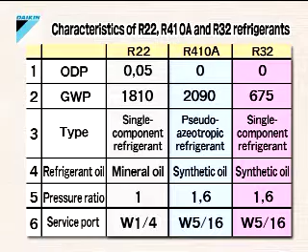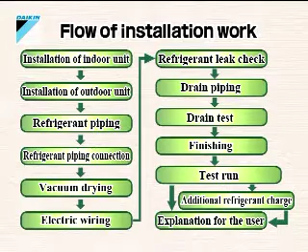This shows the procedures involved when installing split-type air conditioners. This video explains the installation work by the specific procedure in the actual order it is done. First, let's look at the primary tools you will need when doing the installation.

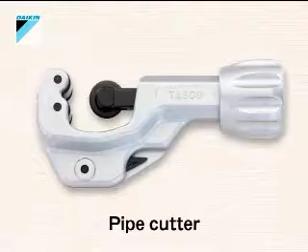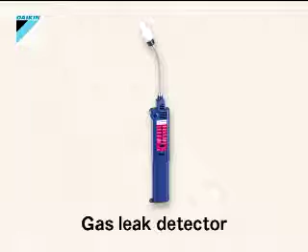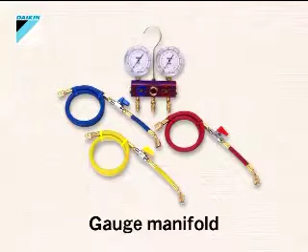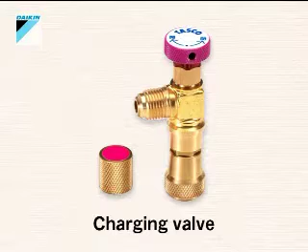Here you can see a level, pipe cutter, reamer, file, flaring tool, flare size gauge, vacuum pump, gas leak detector, weight scale, digital thermometer, torque wrench, gauge manifold. These are gas cylinders for R32 refrigerant. There are no fixed colours for refrigerant gas cylinders. This is a charging valve. These tools can be commonly used for R32 and R410A refrigerants.

Now, let's go over the procedure for installing the indoor unit. Let's look at how to attach the indoor unit's mounting plate. The mounting plate is smaller than the indoor unit, so decide its location taking the size of the indoor unit into account. Also decide ahead of time on which side of the indoor unit the piping through hole will be made.

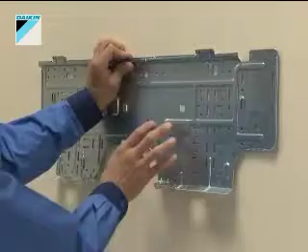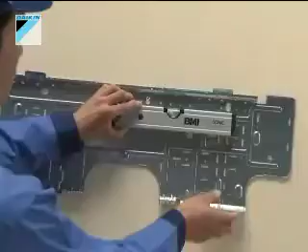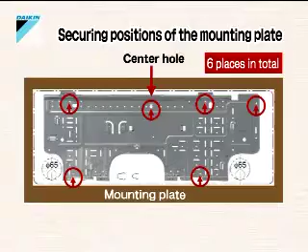Once you have decided where the mounting plate will be attached, temporarily place a screw in the center to secure the plate. Place the level on the mounting plate to make sure it is level. Once this is done, firmly tighten the screw on the center of the mounting plate so that the plate does not move. After that, secure the plate with the 5 remaining screws as shown on the screen. Now, you should have attached the plate firmly with a total of 6 screws. Finally, check that the mounting plate is firmly attached.

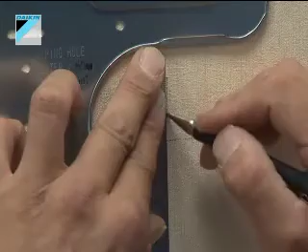Now, let's look at how to open up the piping through hole. If running the piping through the right side, use this part on the mounting plate and the tape measure to determine the center of the through hole. If running the piping through the left side, do it this way.

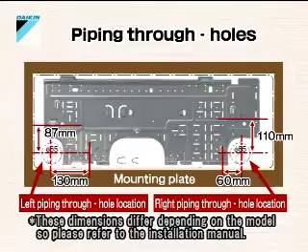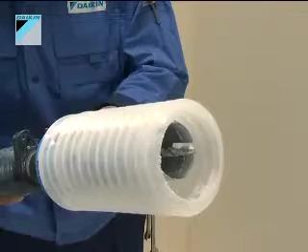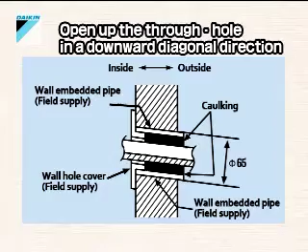The diameter of the through hole is 65 mm. So, use a 65 mm hole saw to open up the through hole. When opening up the through hole, do it in a downward diagonal direction, from indoors to outdoors, to help the drain water flow smoothly and prevent rainwater from running along the piping into the indoor area.

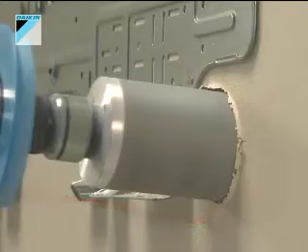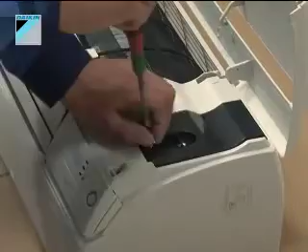Let's look at how to prepare to install the indoor unit. Take the indoor unit out of the packing case and place it on a level surface. Open the front panel and remove the cover of the control wiring connection component. Remove the clamps that are used to secure the wiring sheath.

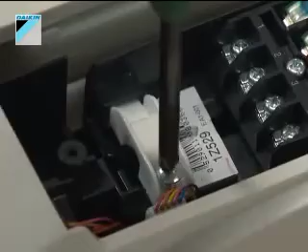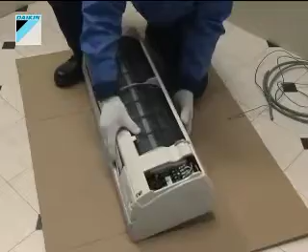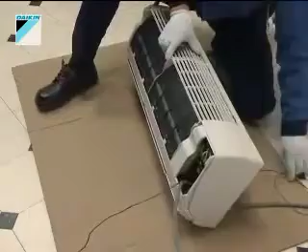Now, prepare the control wiring that connects the indoor unit and outdoor unit. If the wiring length is shorter than 10 meters, use a 2 square millimeter wire. If it is 10 meters or longer, use a 3.5 square millimeter wire. Run the prepared control wiring from the rear of the indoor unit to the front side. Peel the wiring sheath.

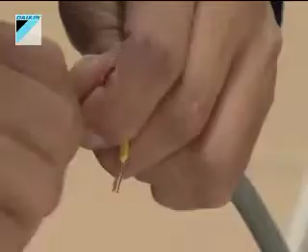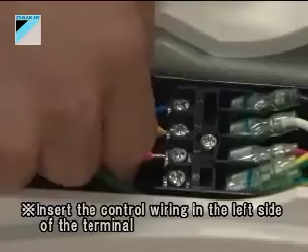Twist the wiring and connect it to the wiring connection terminal. While doing this, note the color and terminal number to which the wiring is connected. This is done in order to align the terminal number with that of the outdoor unit to be connected afterwards. After connecting the wiring to the terminal, make sure it is taut and secure the sheath with a clamp.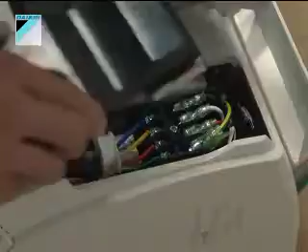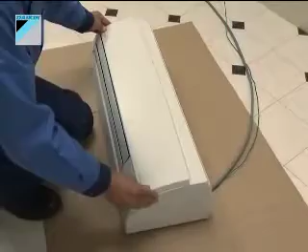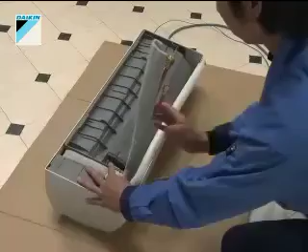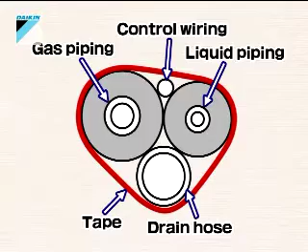Now, reattach the cover of the control wiring connection component. Close the front panel. Turn the indoor unit over and take out the piping. Wrap the refrigerant piping, drain piping and control wiring with vinyl tape in 3 spots. When doing this, be sure to position the drain piping on the bottom. This completes the preparation needed before installing the indoor unit.

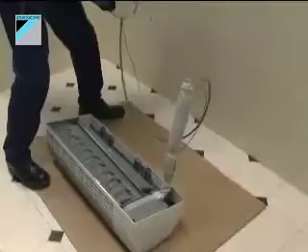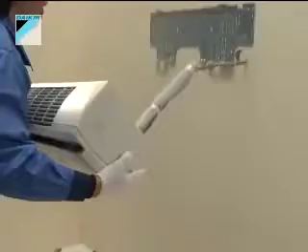First, run the control wiring through the piping through hole. Next, lift the indoor unit up and run the piping and wiring through the hole. Be sure to place the drain piping on the bottom to allow the drain water to flow smoothly. Hook the upper portion of the indoor unit onto the upper portion of the mounting plate first, and then place the lower portion of the indoor unit onto the hook on the lower portion of the mounting plate to securely mount the indoor unit.

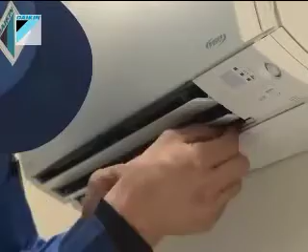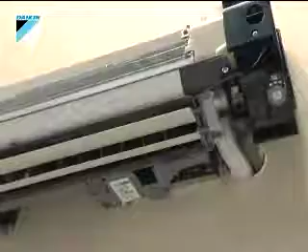To detach the front grille, first unscrew the 2 screws under the flap. Then, unhook the upper portion of the grille and pull it out. Next, secure the bottom portion of the indoor unit to the mounting plate with the 2 screws.

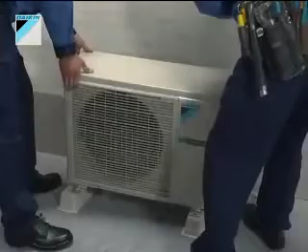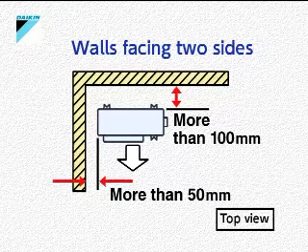Now, let's decide where to place the outdoor unit. When installing the outdoor unit directly on the ground, place it on blocks. When doing so, be sure to create the necessary distance, or in other words, the service space, between the outdoor unit and the surrounding wall or the like. In accordance with the installation manual, have at least 10 centimeters from the back and 5 centimeters from the side of the outdoor unit to allow for sufficient service space.

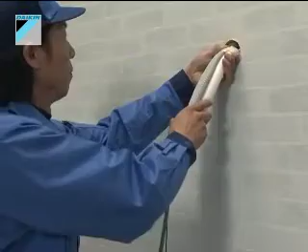Now go outside. Bend the refrigerant piping, drain piping and control wiring toward the outdoor unit without crushing the piping. Be sure to place the drain piping on the bottom. Remove the decorative piping cover on the outdoor unit.

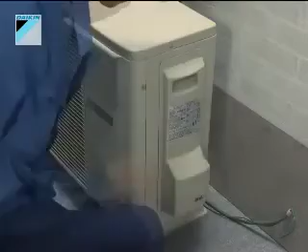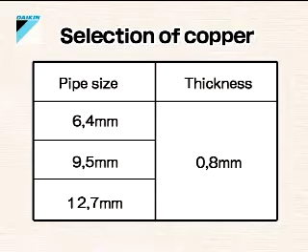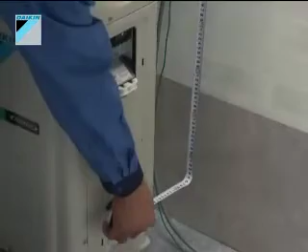Now, prepare the refrigerant piping to connect the indoor and outdoor units. Refer to this table for the correct piping thickness. Measure the distance of the piping route between the indoor unit and outdoor unit to obtain the piping length. Cut the piping roughly 30 centimeters longer than the length you have just obtained. Protect both ends of the piping with tape. Insert the piping into the insulation.

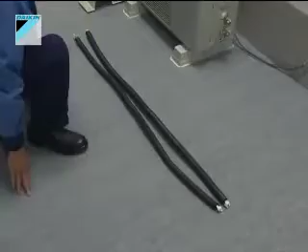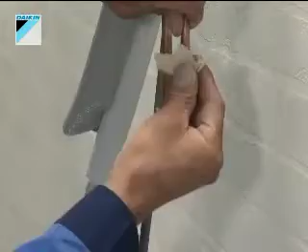Remove the indoor unit's flare nut and protect the flare joint with tape. Remove the outdoor unit's flare nut in the same way and protect the joint with tape.

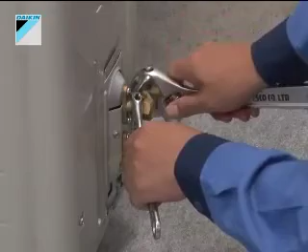Let's look at work on the refrigerant piping. It is necessary to conduct the flaring while adhering to the 3 principles of refrigerant piping: dry, clean and tight. When the piping is cut, the end surface will develop burrs. Remove these using a reamer and file. Be sure to face the piping end downwards during this process to prevent any filings from getting inside. These are photos before and after burr removal.

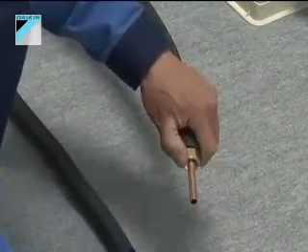Now, conduct flaring to connect the piping. First, slide the flare nuts that you have removed from the indoor and outdoor units onto the piping. Note that the piping diameter will be larger after flaring, so the flare nuts cannot be slid onto the piping after flaring.

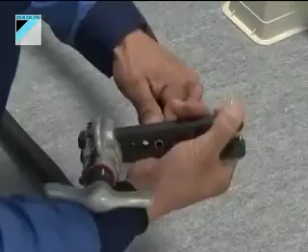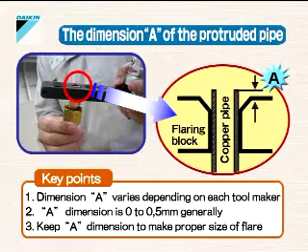Create the flare using a flaring tool. Set the piping inside the flaring block. Adjust the piping allowance and secure it firmly. The standard allowance ranges between 0 and 0.5 mm, but this will differ according to the flaring tool. After setting the piping in the flaring tool, create the flare by rotating the handle.

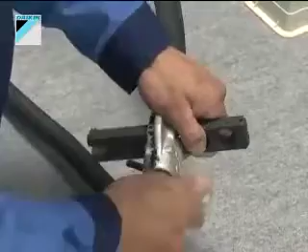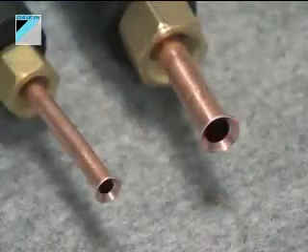Confirm the quality of the completed flare. Check the flare size using a flare size gauge. If the size of the completed flare is larger or smaller than the flare size gauge, redo the flare according to the instructions of the flaring tool manufacturer. If the size is appropriate, check for any flare deformations, dirt and dust, or scratches on the flare.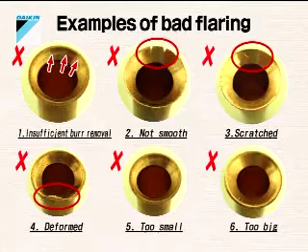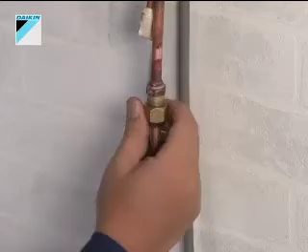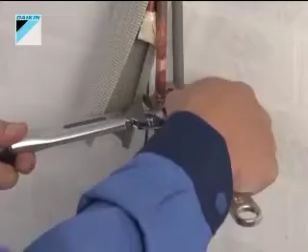Let's connect the refrigerant piping between the indoor unit and outdoor unit. First, manually tighten the indoor unit side flare nut for the larger piping. Next, use torque wrenches to tighten the nut to the desired torque. Be sure to use 2 wrenches when tightening.

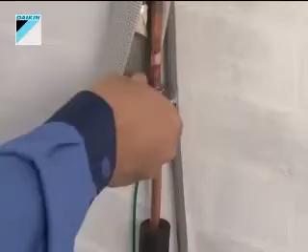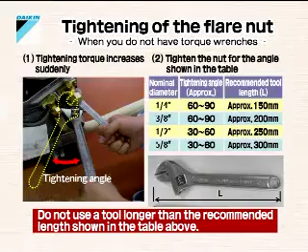If you do not have torque wrenches, you may use normal wrenches. When tightening with normal wrenches, first turn the nut as far as you can by hand. Then use 2 wrenches to tighten the nut until it suddenly becomes difficult to turn. Finally, further tighten it precisely to the angle shown in the table. Using the same procedures, now tighten the nut for the smaller piping.